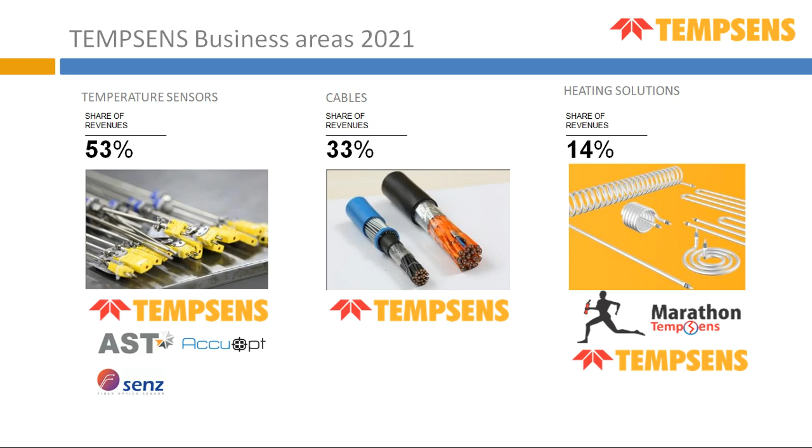We have more than 600 employees and three global locations. We have manufacturing units in India, Germany, and Indonesia. We are exporting to more than 75 countries, and we have more than 6,500 customers.

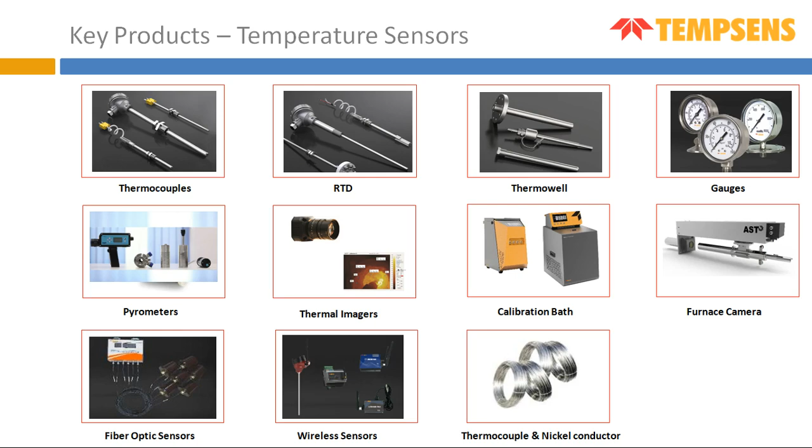In the temperature vertical, we have thermocouples, RTDs, thermowells, gauges, pyrometers, thermal imagers, calibration equipment, furnace cameras, fiber optic sensors, wireless sensors, and thermocouple and nickel conductors.

In the cables, we have thermocouple and RTD cables, high temperature insulation cables, special cables like solar cable, mineral insulated cable, instrumentation cables, and control cables, mainly LT cables up to 1.1 kV, and wires.

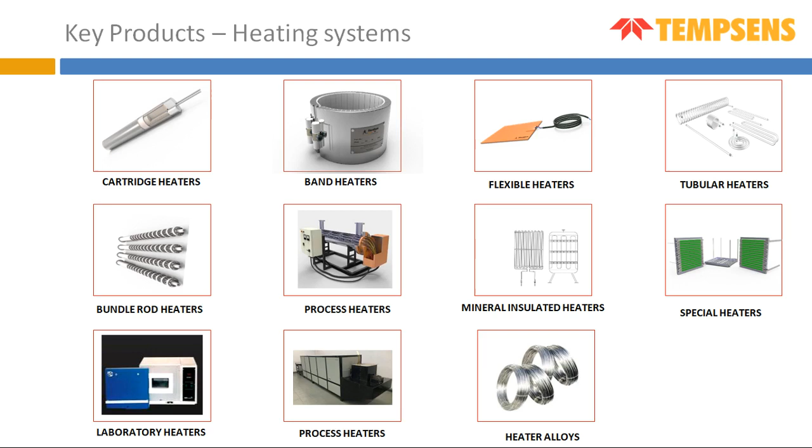In the heating system, we have cartridge heaters, band heaters, flexible heaters, tubular heaters, bundle rod heaters, process heaters, and other heating solutions. In detail, we are seeing the applications.

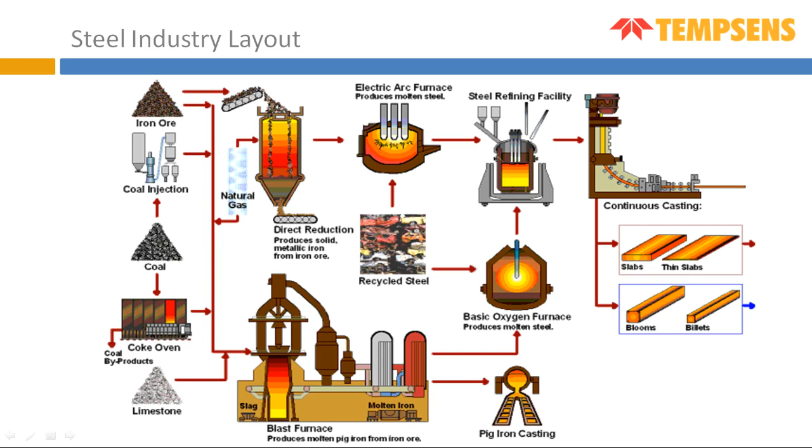We are serving our products in steel industries from mining to the finished products, like in the coke oven, sinter plant, blast furnace, DRI, steel melting shops, heating furnace and rolling mills.

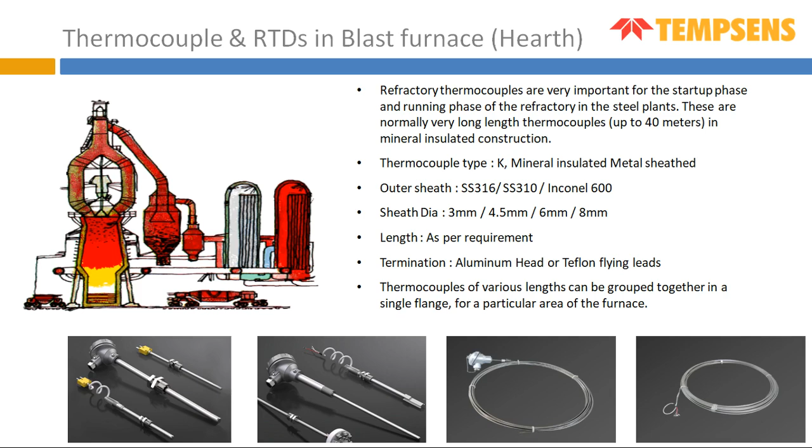In thermocouples and RTDs, in the blast furnace, we are giving the sensors to blast furnaces in different kinds of design, like hearth thermocouples. A hearth thermocouple is a little longer thermocouple. This is a mineral insulated thermocouple with thermowell also, like 5 meters, 6 meters, or 30 meters.

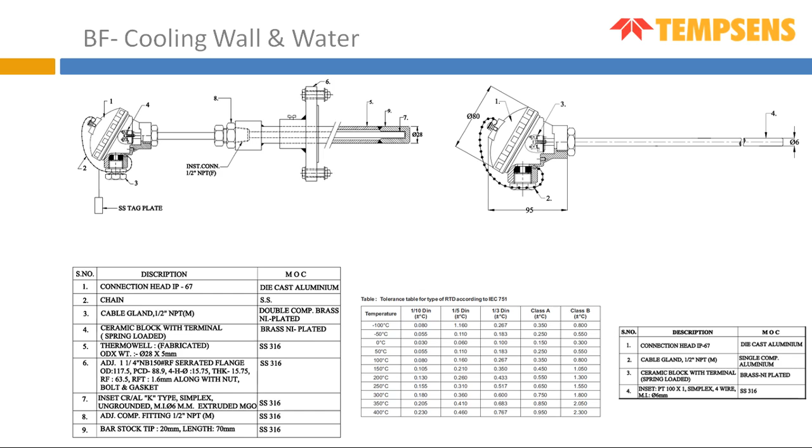Then we have the RTDs for cooling wall and water temperature. For cooling water of the furnace, we are making very special RTDs up to 1/10 accuracy. At 100 degrees, the accuracy is around 0.08 degree.

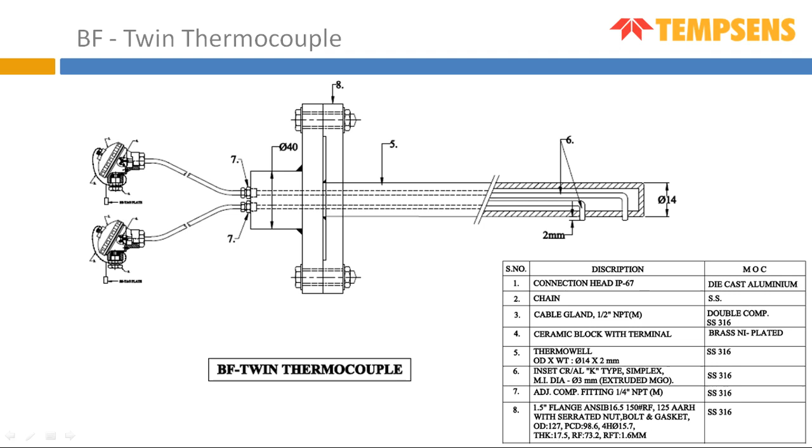Then for the blast furnace there is a twin thermocouple. These twin thermocouples are mainly used in smaller furnaces like mini blast furnaces. This is the two level thermocouple. Then we have hearth bottom thermocouples. The hearth bottom thermocouple is a kind of multi-point thermocouple. In one flange, 3, 6, or more than 7 thermocouples are installed in different lengths.

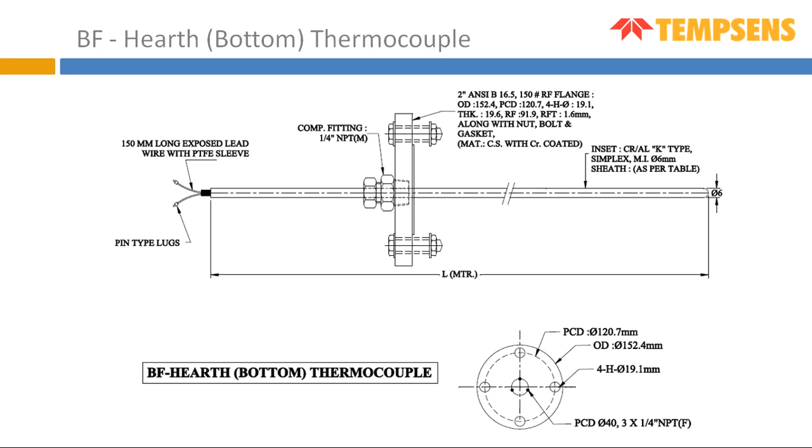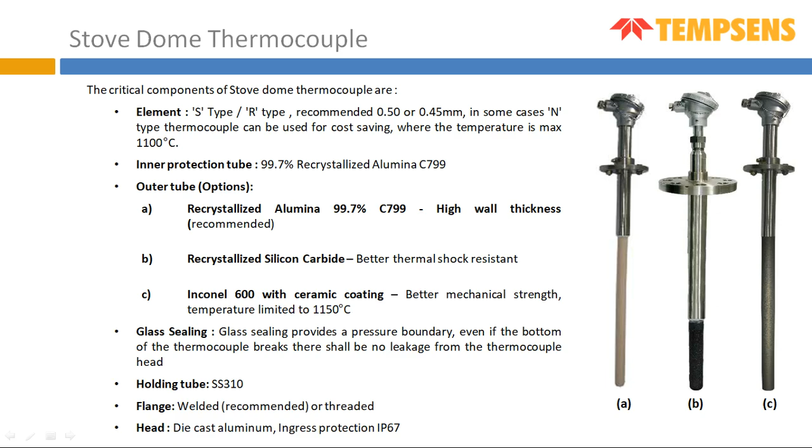This Inconel bar stock with ceramic coating is for low temperature like 1150 degrees, mainly used in mini blast furnaces, and we are giving Inconel bar stock with ceramic coating.

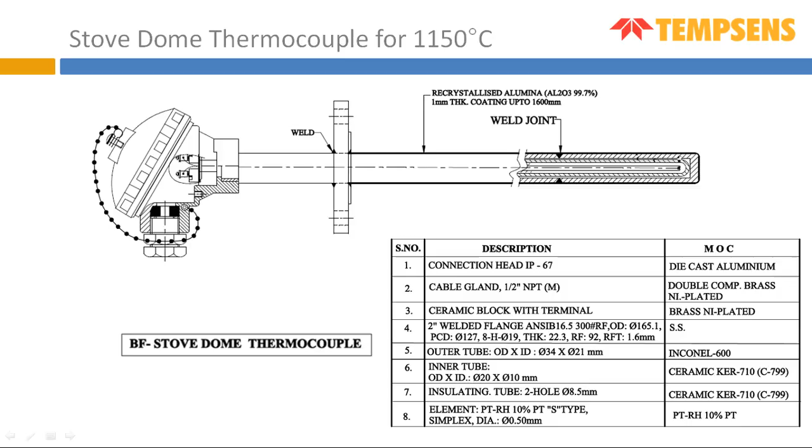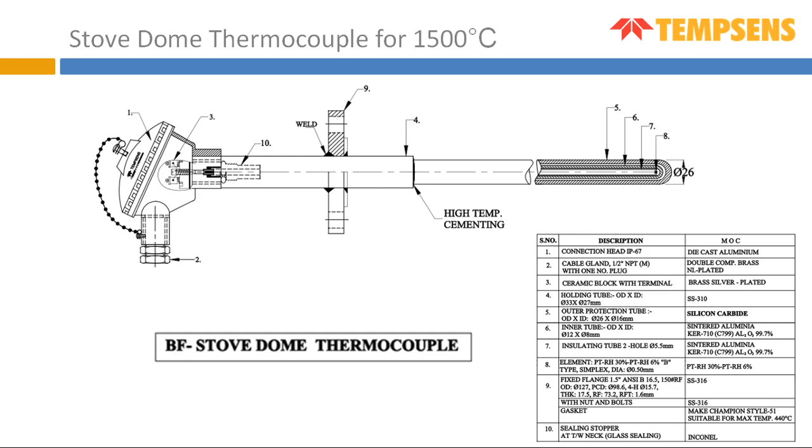Then we have the stove dome thermocouple with silicon carbide. The outer sheath is silicon carbide, and the inner tube is KER, because silicon carbide tubes are porous tubes. Inside is the KER710 tube. These are impervious, gas tight tubes, and we are using a very special arrangement here, the glass sealing. In case of ceramic tube break, the gas cannot go outside. Same design is with the KER710.

In the blast furnace, we have a special pyrometer for molten metal application. In that molten metal application, we are giving two color pyrometers, and we can install our pyrometer at more than 40 meters. And this pyrometer can be used for slag temperature also.

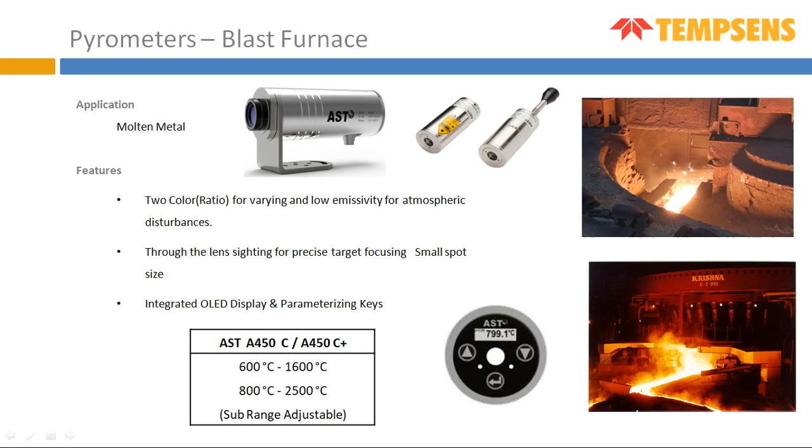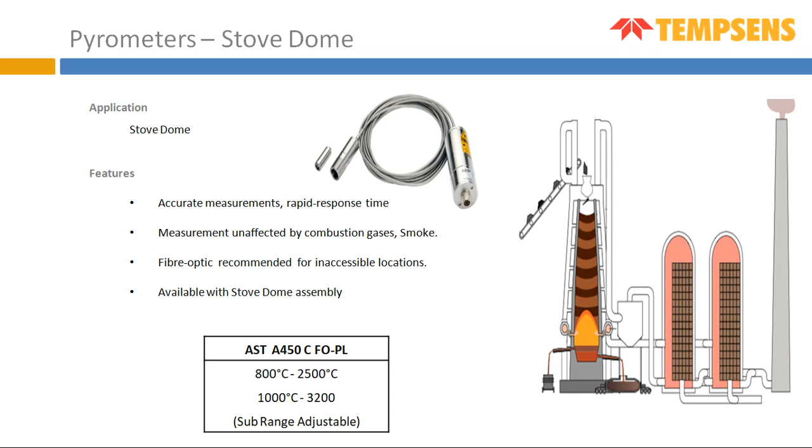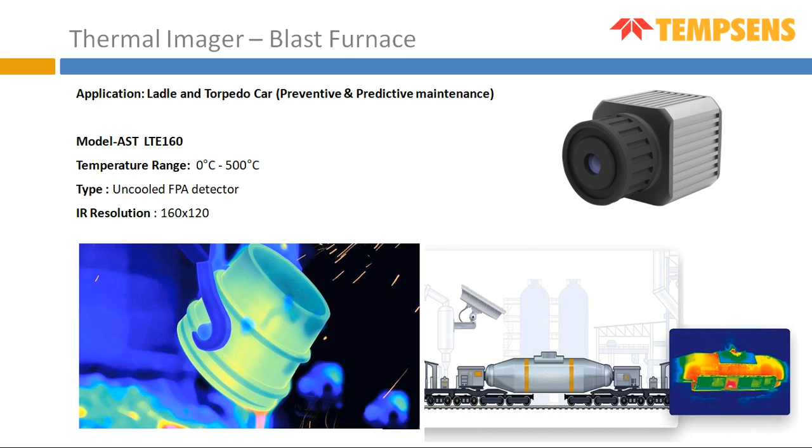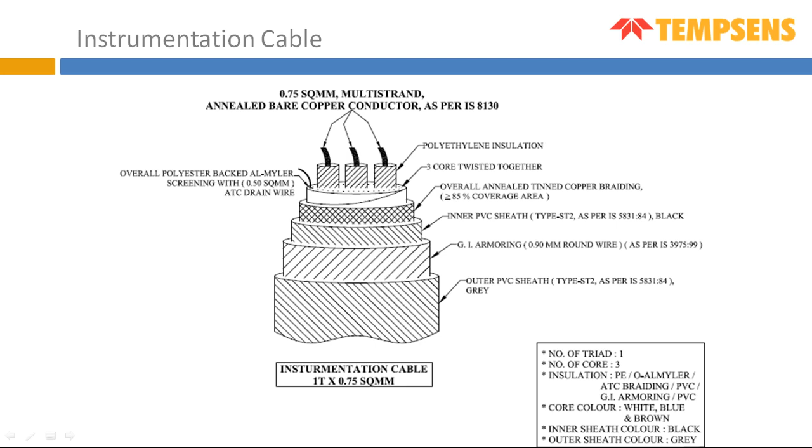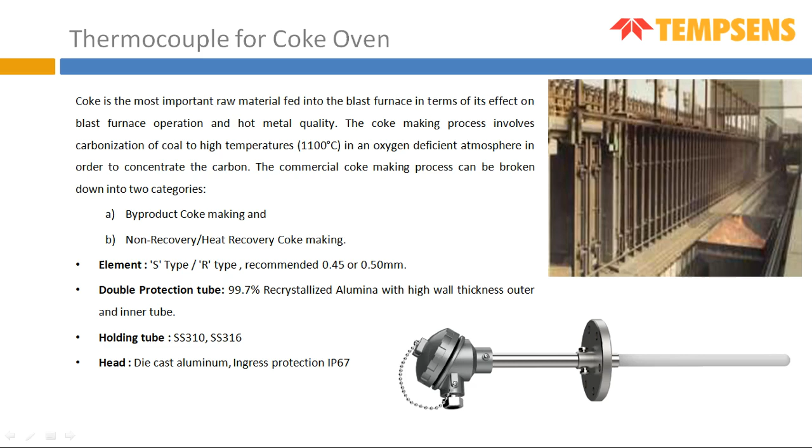In the coke oven, we are supplying for both coke oven processes. One is byproduct, meaning recovery coke ovens. We are supplying our sensors, and to non-recovery coke ovens also. In the non-recovery coke oven, we are giving two layers of tubes like 24 by 12 or 20 by 12. We are giving high wall thickness tubes in this application.

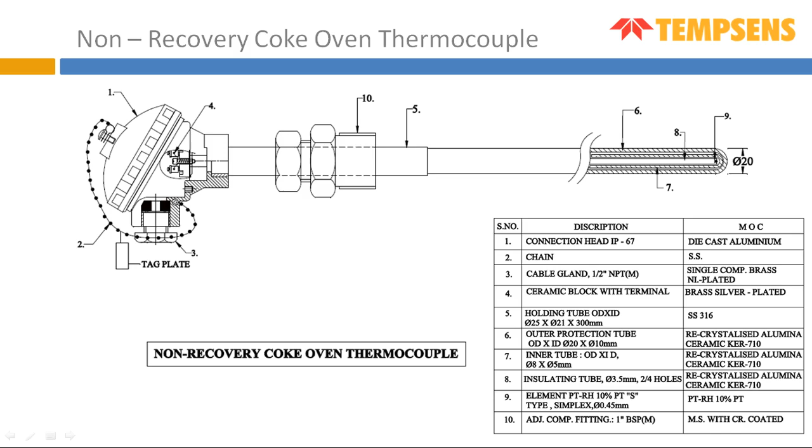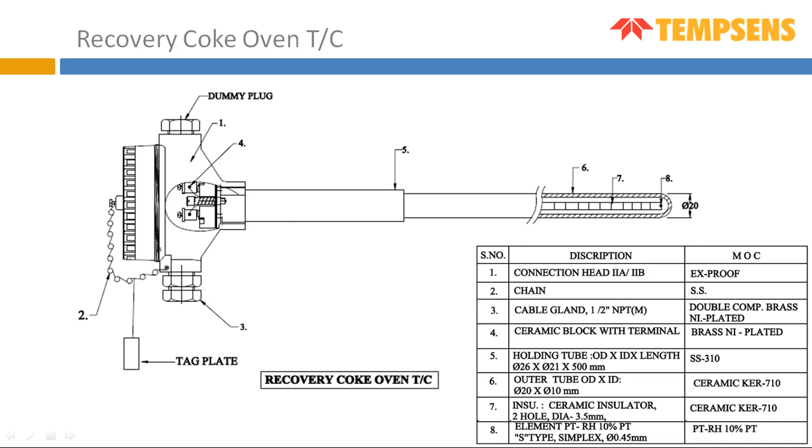Same in the recovery coke oven. We have very special R-type or S-type thermocouples, but in very long lengths, like 2.3 meters or 2 meters. We are also using high wall thickness tubes here.

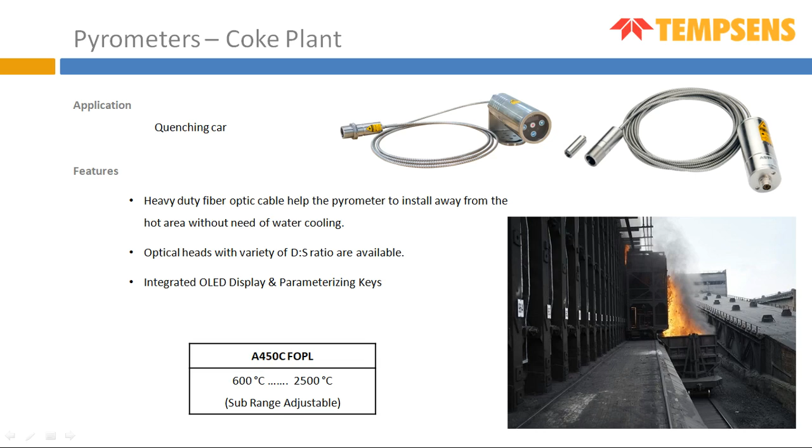In the coke oven, we are using an optic pyrometer because the atmospheric temperature is a little higher. This is for the quenching car temperature measurement. Before water quenching, we put the pyrometer. Then we have a special pyrometer for the coke oven. Its specialty is that more than 4000 temperatures can be stored.

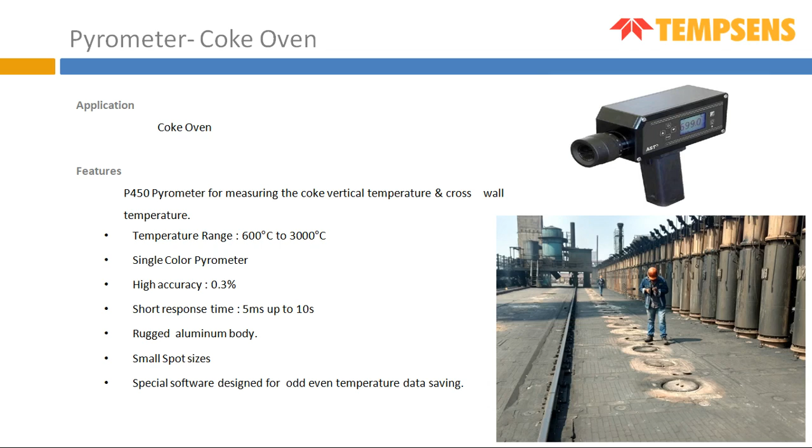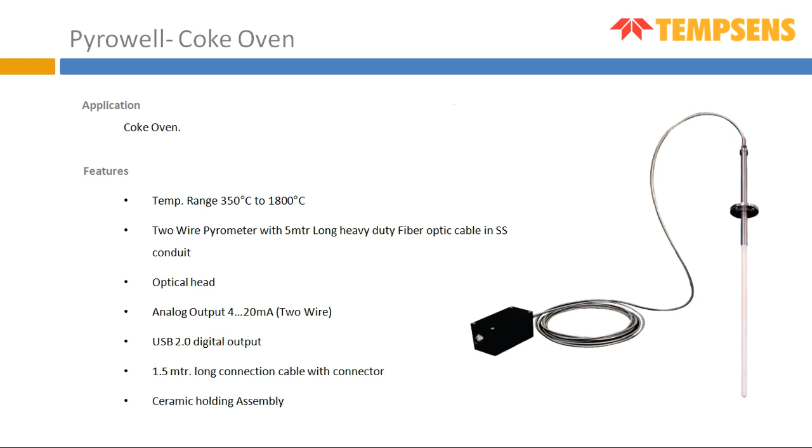This is a very interesting product. It is a Pyrowell for the coke oven. This is a substitute for a thermocouple. Nowadays, S-type, R-type, B-type elements are very costly, so we made this solution for that. The output is 4-20 output, and it looks like a thermocouple. Then we have a full range of cables for the coke oven.

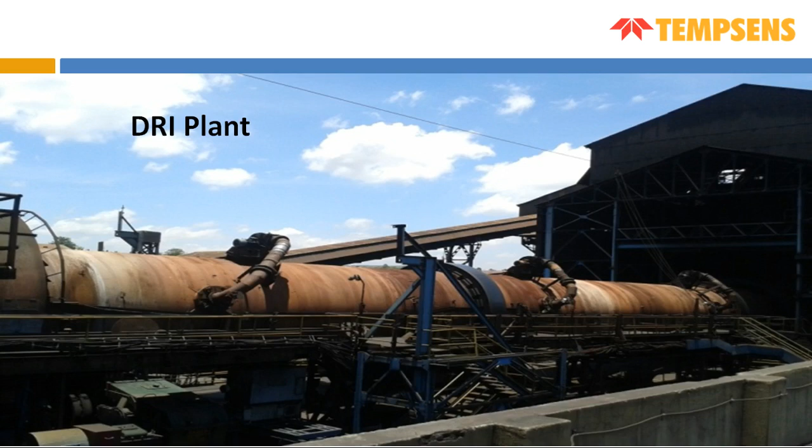The DRI thermocouples, for the DRI plant, direct reduced iron. We are supplying a lot of sensors in that. Mainly three kinds of products are used here. One is the main thermowell. In the main thermowell, we are giving SS310, Inconel 600, 316, and different lengths as per the requirement of the customer.

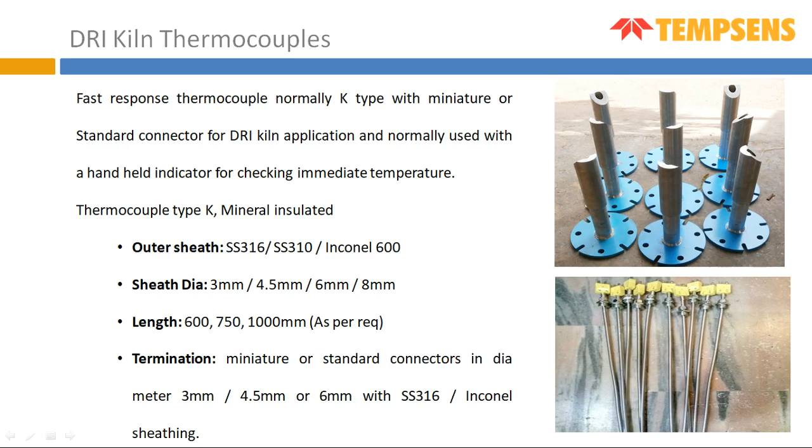Then we have the QRT. In the QRT, we are using a standard connector, a heavy duty connector, and we are giving Inconel, 310, all kinds of material. And for this QRT, we are also supplying the protection tube.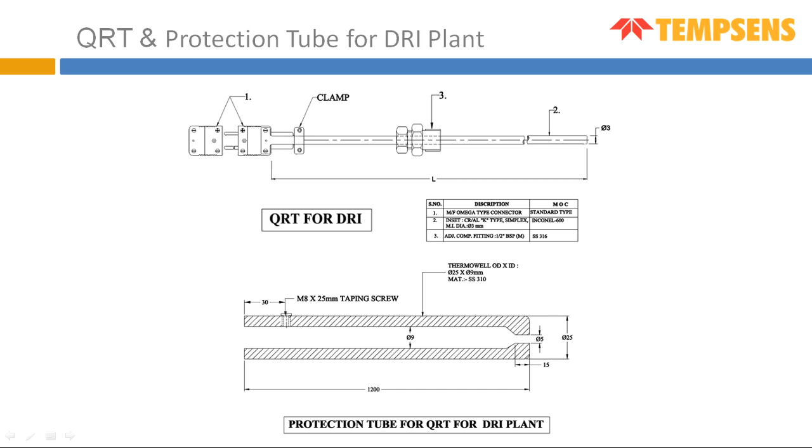Same in the normal thermocouple. For normal response thermocouples, we are supplying all kinds of material like 316, 310, Inconel, and different kinds of OD and length protection tubes, drilled bar stock. We have the capability to drill a single drill up to 1500 mm.

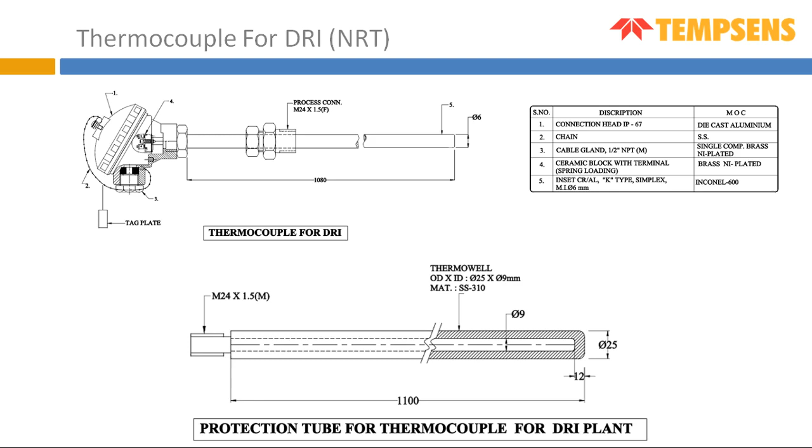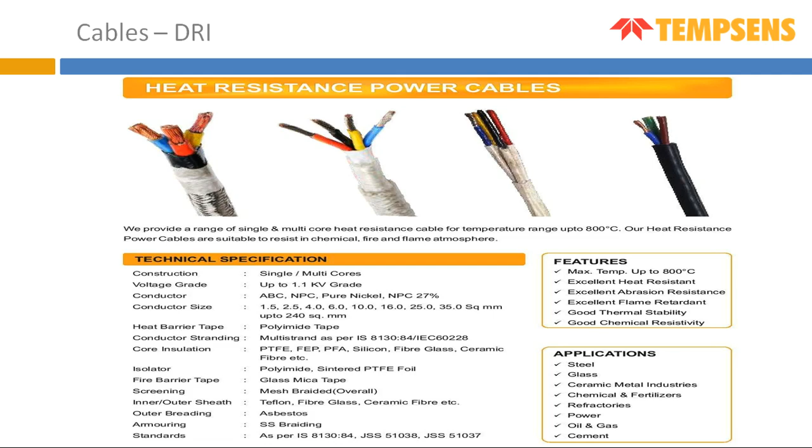We make very special cables for DRI, up to 800 degrees, with different insulation. We supplied in all plants like Tata, BSL, JSPL, everywhere. This is 16 square. The design is PTFE inside, and we are using very high temperature mica taping. Because of the mica taping, the inside temperature cannot rise.

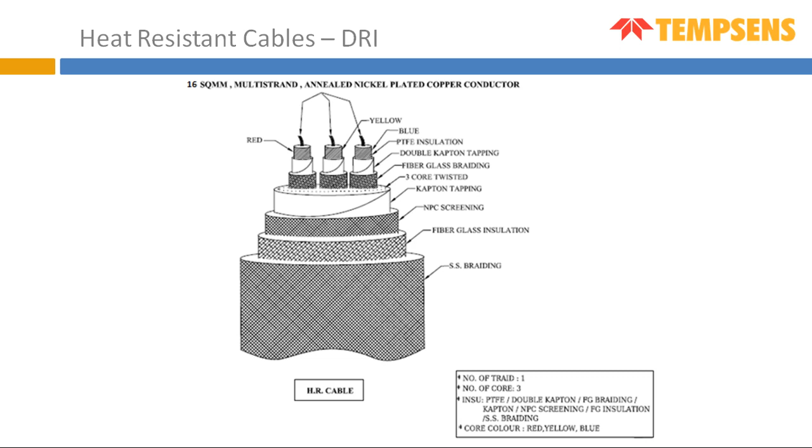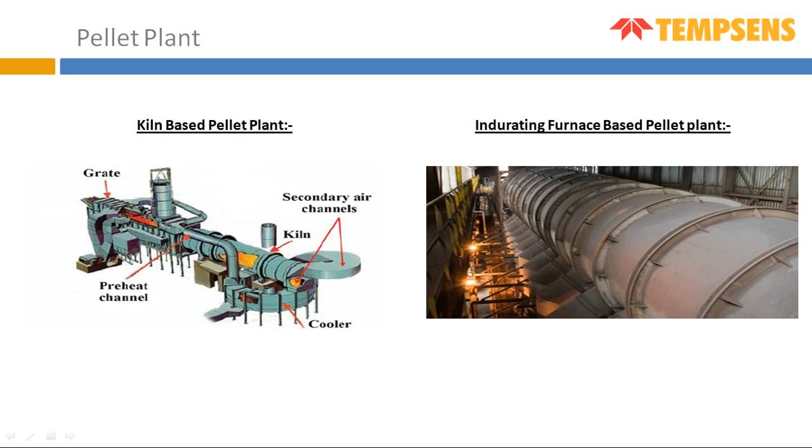In the pellet plant, for both processes we are supplying our sensors: the kiln-based pellet plant and the indurating furnace. For the kiln-based pellet plant, we are supplying S-type thermocouples as per the customer design, like with silicon carbide, with KER710, with an Inconel bar stock. Then K-type sensors, so different kinds of design as the customer requires.

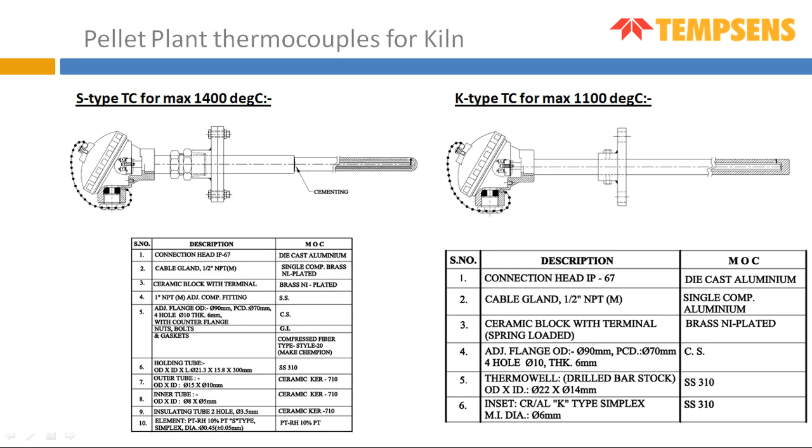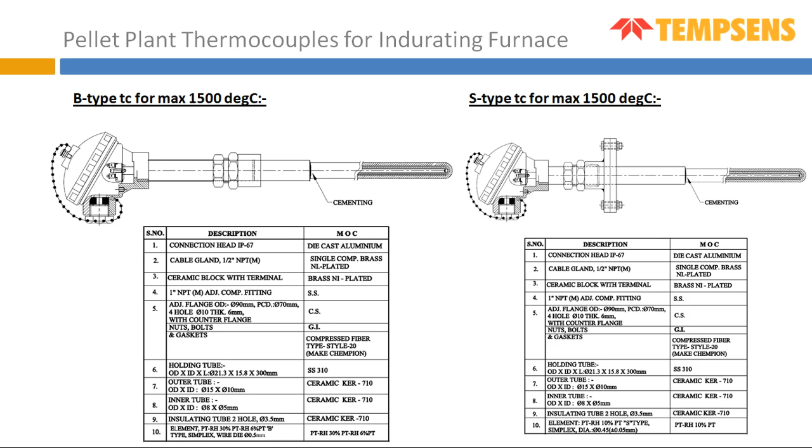Then the indurating furnace. In the indurating furnace, people previously were using Kanthal Super. The Kanthal Super tube was very costly, more than 2 lakh rupees for the tube only. So we proposed this KER710 tube and the results are good, and we have been supplying these kinds of sensors, B-type and S-type, for many years.

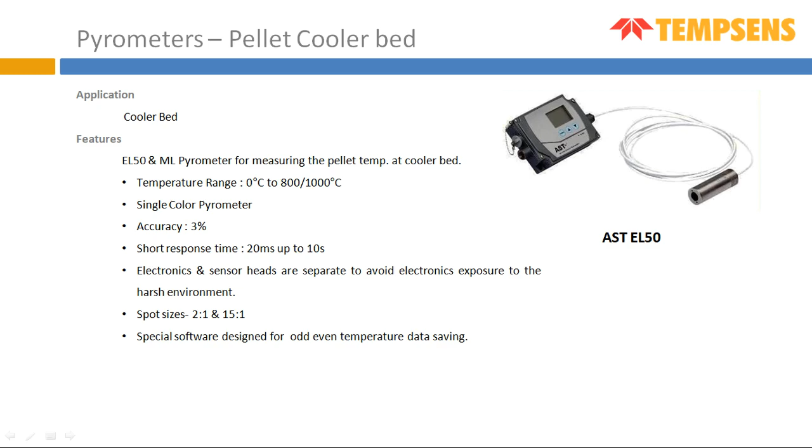For the pellet plant cooling bed, we offer the pyrometer EL50. Same thing for DRI also, we are supplying the same pyrometer for the DRI cooling bed. We have done a lot of pellet plant projects with control and instrumentation cables. Load cell cable we are making.

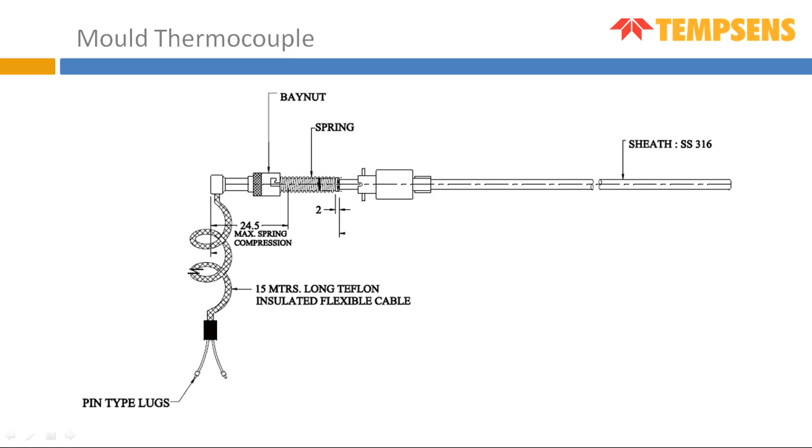These are mould and tundish thermocouples in continuous casting. Different kinds of design for different plants. Some plants we are giving a bayonet kind of arrangement for the mould thermocouple. Some places it is a normal fitting, we are supplying M8 thread. We developed a very special mould thermocouple with the LEMO connector.

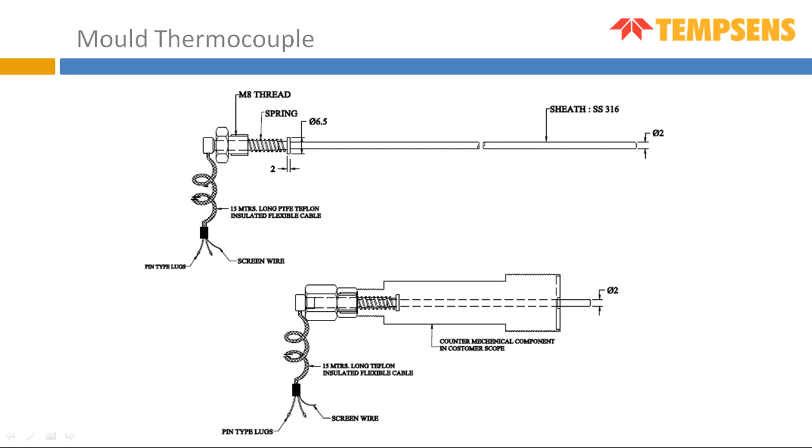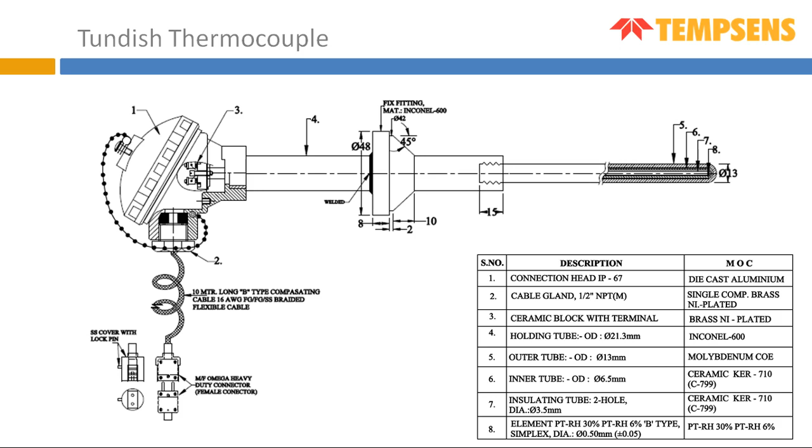For tundish regular temperature measurement, we developed this sensor with the molybdenum tube and KER710, and this wire is 10 meters because the atmospheric temperature is very high. Then we recently demoed this tundish nozzle temperature measurement. This thermal imager is a very special thermal imager, 700 to 1800, an online thermal imager.

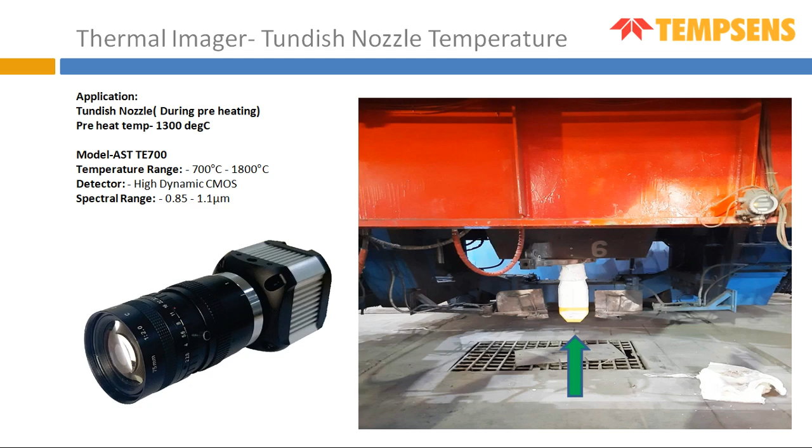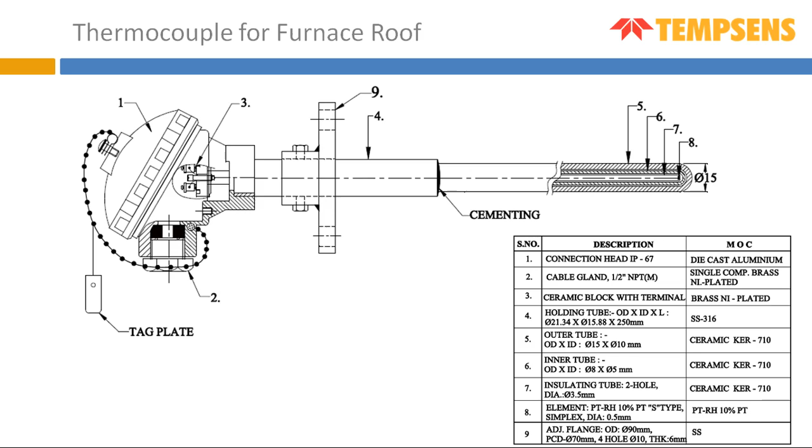For preheating and reheating furnaces, we have solutions for thermocouples, with different ODs and different lengths based on the furnace design. We are supplying KER710 with 15 mm OD, 24 mm OD, 20 mm OD, and 2 layers of ceramic inside the insulating tube.

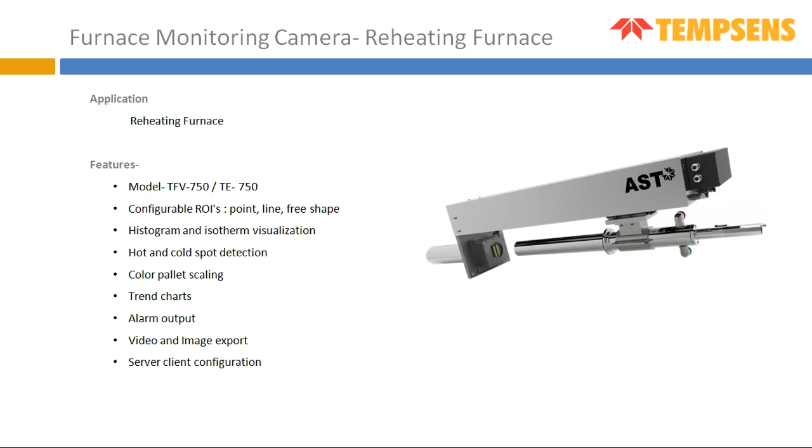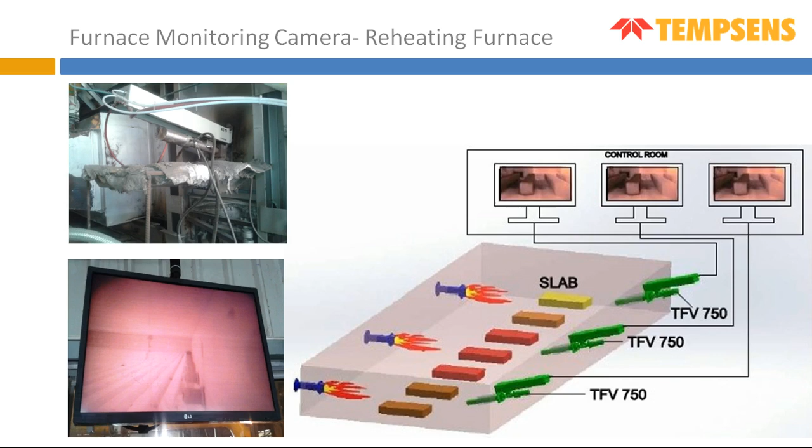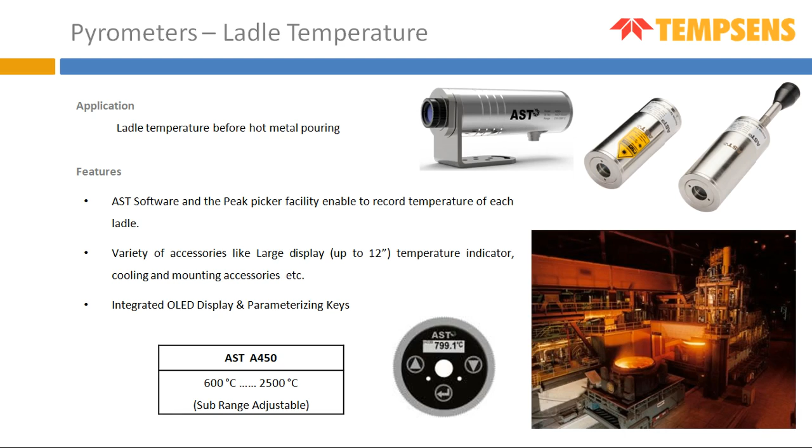Steel melting shop. In the steel melting shop there is the ladle preheating temperature. We are offering the pyrometer for ladle preheating temperature. This may be 2 color, or some places we install single color also. For ladle pouring time temperature, or the blast furnace, also some mini blast furnaces pouring directly into the ladle, we are offering the 2 color pyrometer, the special pyrometer IR cast 2C.

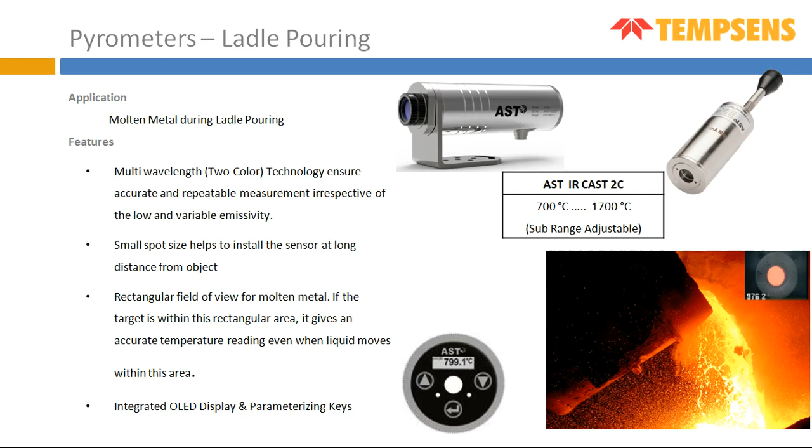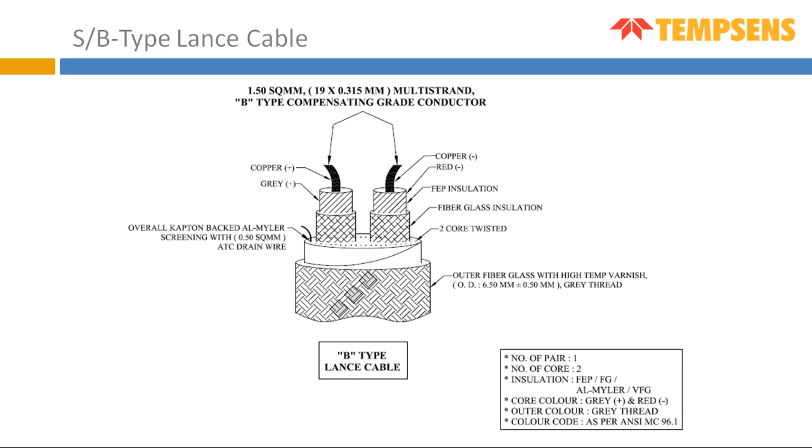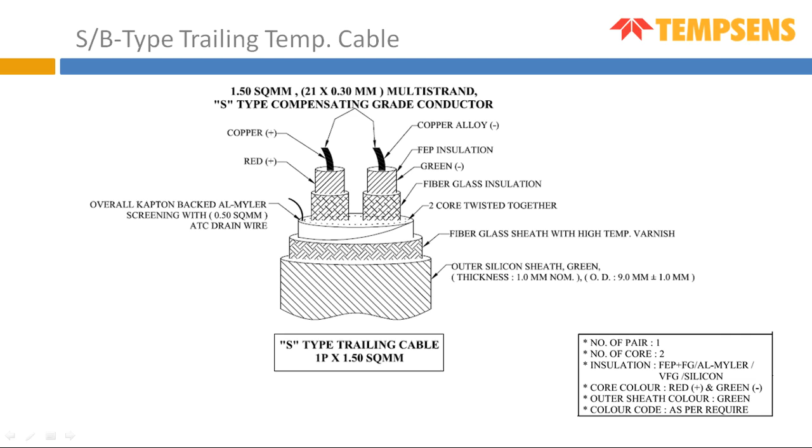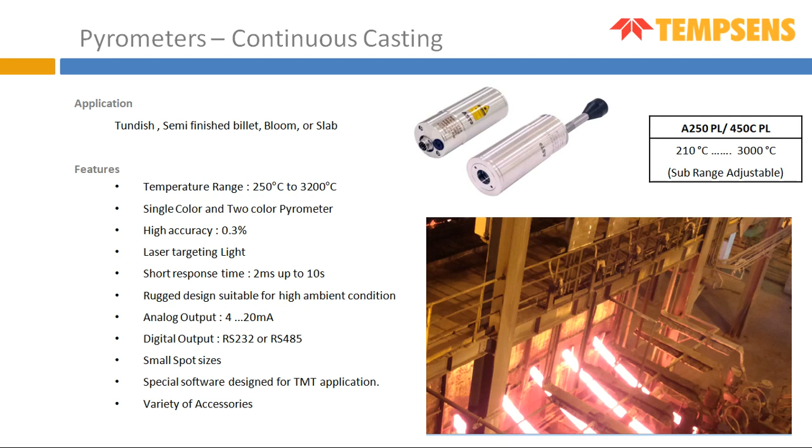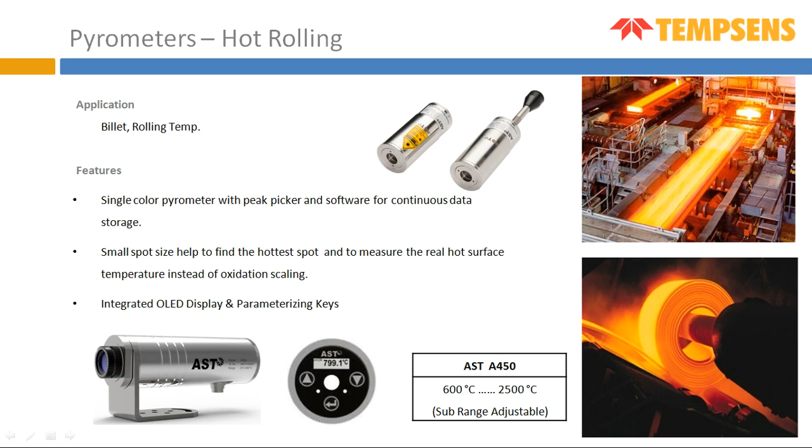Then continuous casting pyrometers: in one plant we installed 5 pyrometers for 5 continuous casting machines. These are all single color pyrometers. This is hot rolling. In hot rolling, some places with smoke use the two color pyrometer; some places that are clear use a single color pyrometer. Then for the wire rod mill, we have a special pyrometer with a lower spot size, the fiber optic sensor.

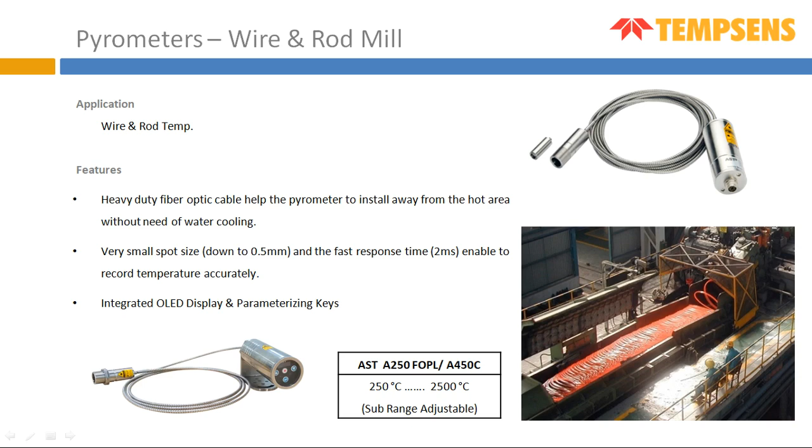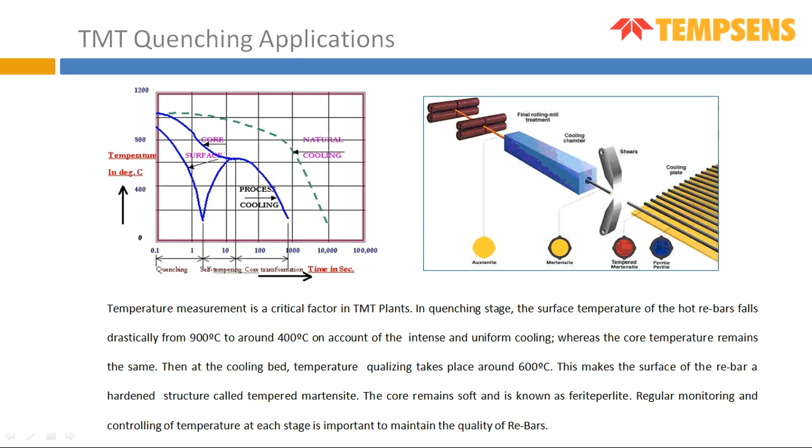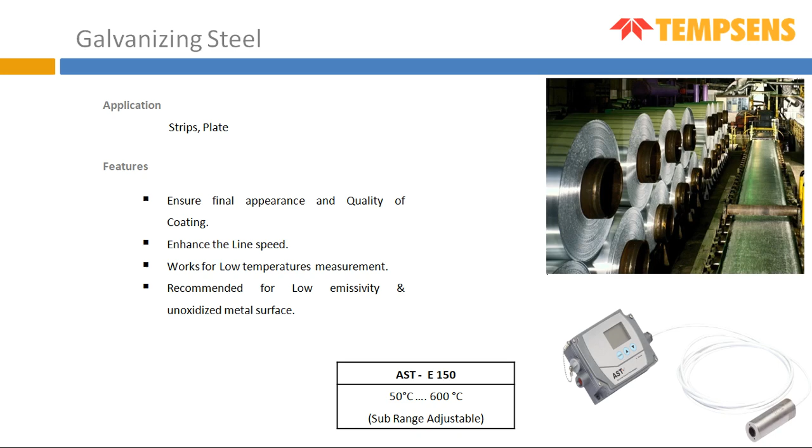The TMT plant. In a lot of rolling mills, we are supplying with the OEMs or direct; before water quenching and after water quenching, they install two pyrometers. This is the A250 pyrometer and A450 pyrometer. Then for the galvanizing line, we are giving the pyrometer E150. For the annealing furnace, the pyrometer is single color, and some places also use two color pyrometers.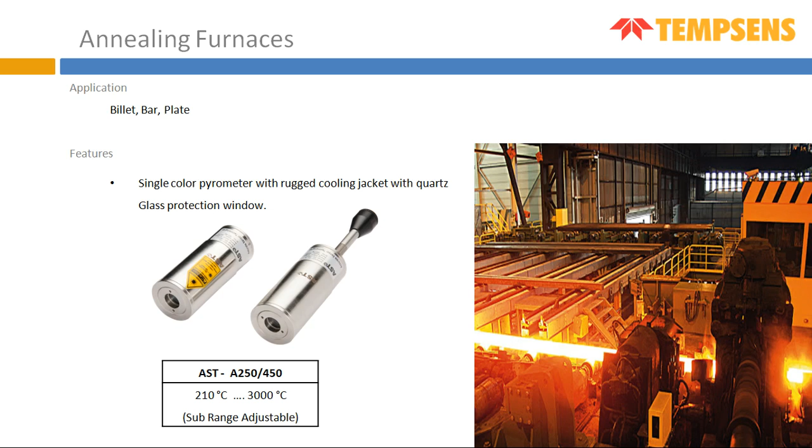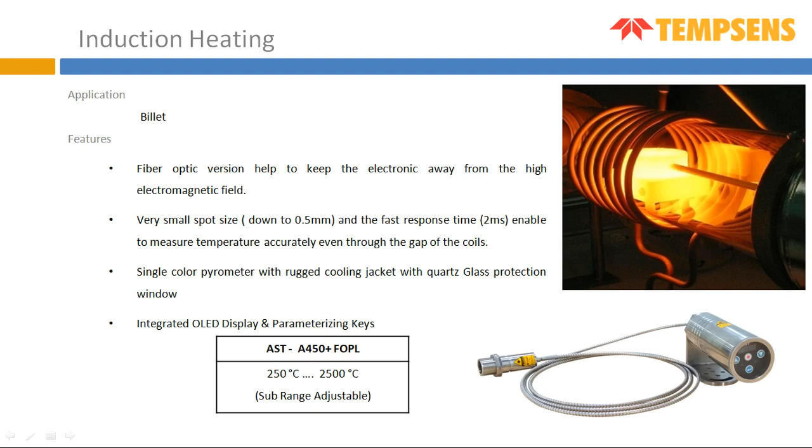Induction heating: we supplied a lot of pyrometers in induction heating, mainly used in the automobile sector, before forging. And heating solutions. We have different kinds of heating solutions in the steel plant, like the oxygen plant and nitrogen plant. We supplied a lot of tubular heater systems. In blast furnaces, we supplied JSW Salem and JSPL Raigarh. In SMS, we supplied a lot of heating systems.

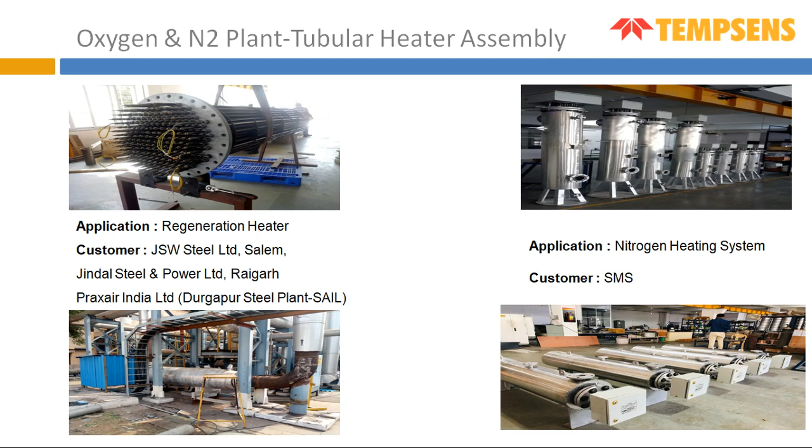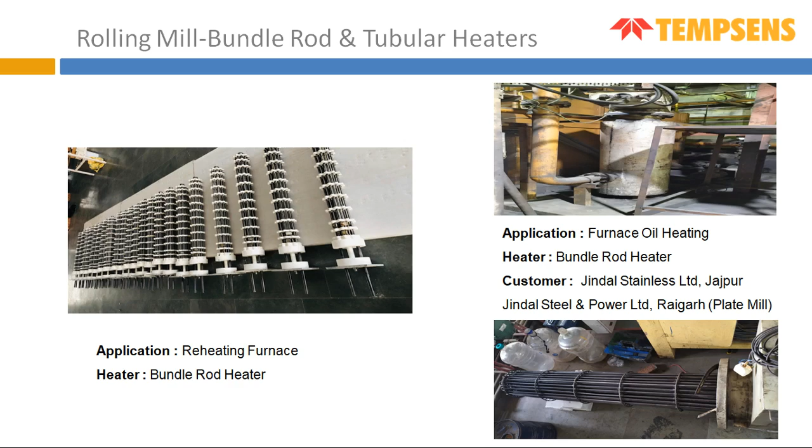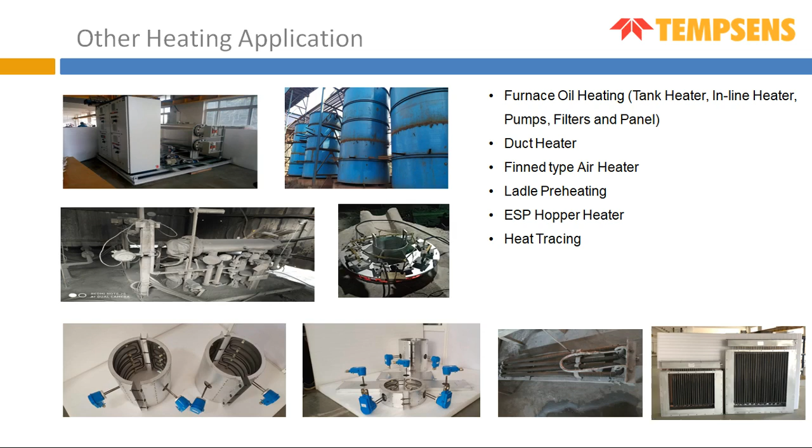Then in the rolling mill, for the reheating furnace we supplied the bundle heater, we supplied heat treatment furnaces, and different kinds of solutions for furnace oil systems, and a lot of other heating systems also, like hopper heating, air heating, different kinds of heating systems.

Calibration and furnaces. For calibration we have the capabilities, NABL accredited laboratories. We have 4 accredited laboratories: Udaipur, Baroda, Bangalore, and Jakarta, Indonesia. We have a 5 fixed point cell primary calibration system, and our NABL capability is -196 to 1600 degrees for contact type sensors, and -30 to 3000 degrees for non-contact sensors. We also have on-site calibration capability up to 1200.

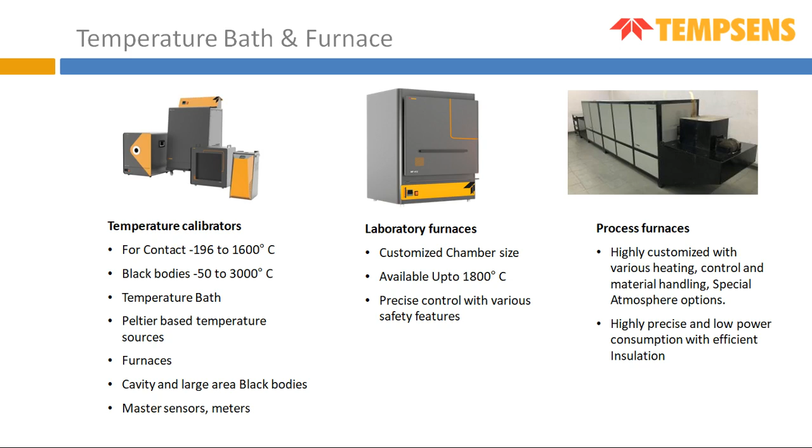We do AMS TUS for furnaces, and we have a big range of calibrators: contact type from -196 to 1600 degrees. Then non-contact black bodies, we are making -50 to 3000 degree calibrators. And laboratory furnaces, we are making up to 1800 degrees. Small process furnaces we are also making, for annealing or heating of the job. Thank you.